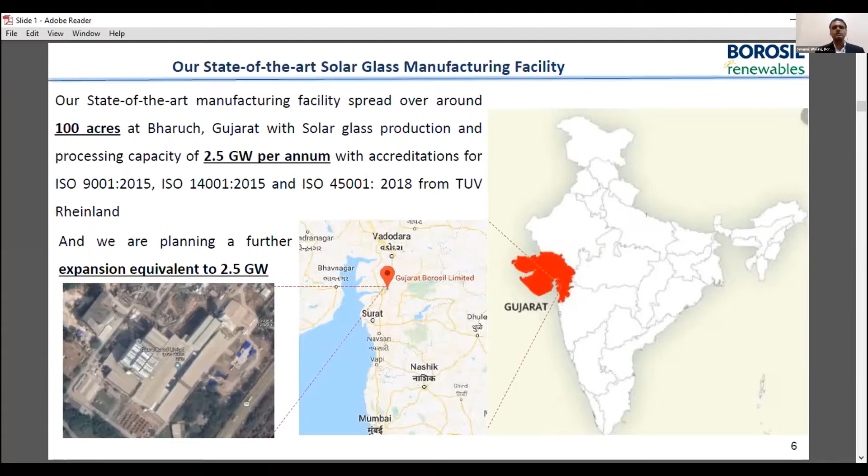So we'll be a 5 gigawatt company when it comes to solar glass for the modules shortly. So these are some of the photographs of our factory. We also have an R&D setup of 302 kilowatt on a rooftop, and we are expanding that setup. Very shortly we'll be having one more R&D setup where we'll be testing many solar modules as well as

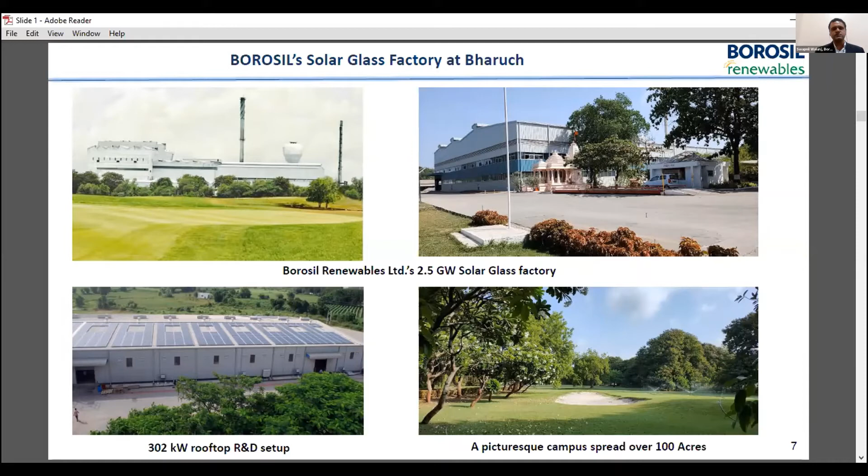glass technologies. Then I'll come to the main topic, solar glass and the importance of selection of high quality glass in solar modules. So all of you know this, solar glass is one of the important components of the solar module, which primarily protects the solar photovoltaic cell against damages from external factors like water, moisture and dust. But that's not the only thing. It also offers low reflection, high transmissivity and high strength to the module.

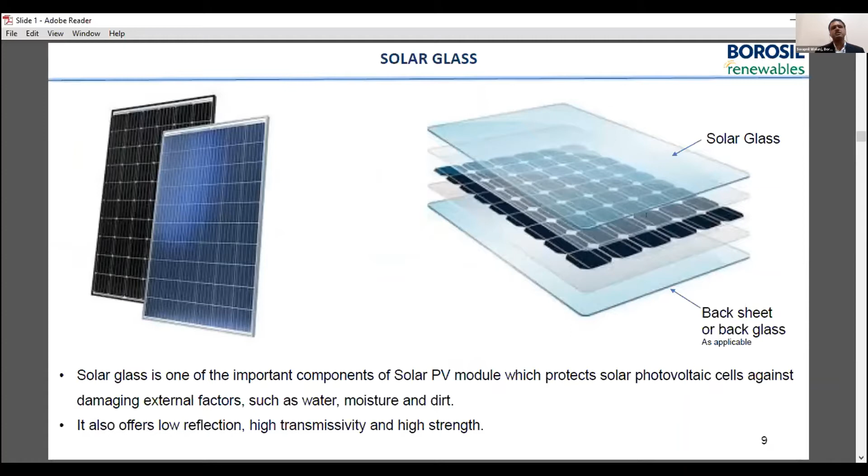So that's how solar glass is important, and why we should be careful while selecting the solar glass is this very popular graph that almost everybody refers to. So if you see the failures, they are categorized in three categories: infant, midlife and wear out failures. Typically infant failures happen very quickly, and those related to glass are primarily glass breakages.

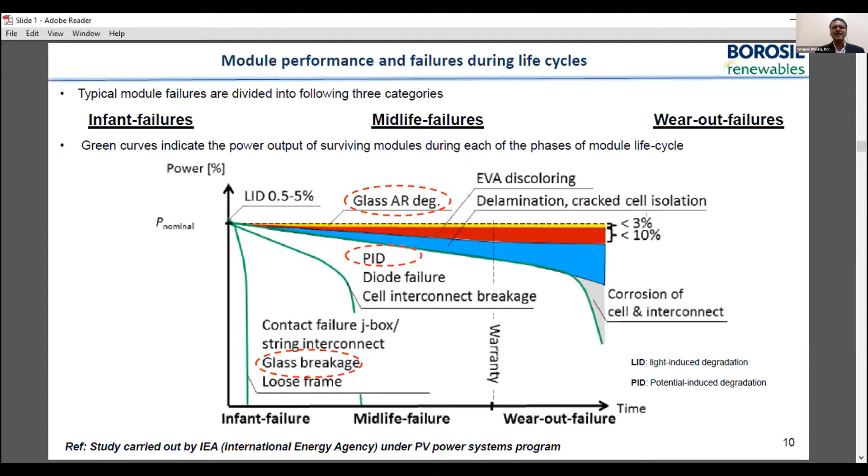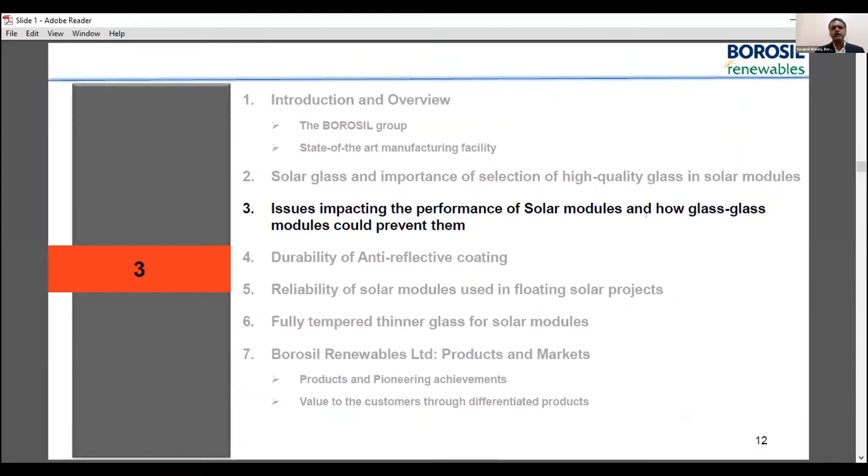So I'll move on to the next level of details. What are the kind of issues that are directly related to solar glass? So what happens if we are not careful while selecting the solar glass, or not careful while designing the solar modules? The immediate impact is due to cracks, basically micro cracks in solar cells. They happen typically during transportation or even installation.

Since the module design is also driven by glass, if the design is not done properly, then there is a risk of cracks or micro cracks, which will ultimately spoil the performance of the modules. Then there are of course snail trails, which is basically discoloration of the panel. This happens typically over a period of, let's say, 2 years, and then power production starts being impacted. There is also another issue of moisture ingress, which I'll come to in the next slide, which happens through the backsheet, and then it starts impacting the EVA as well as the cells.

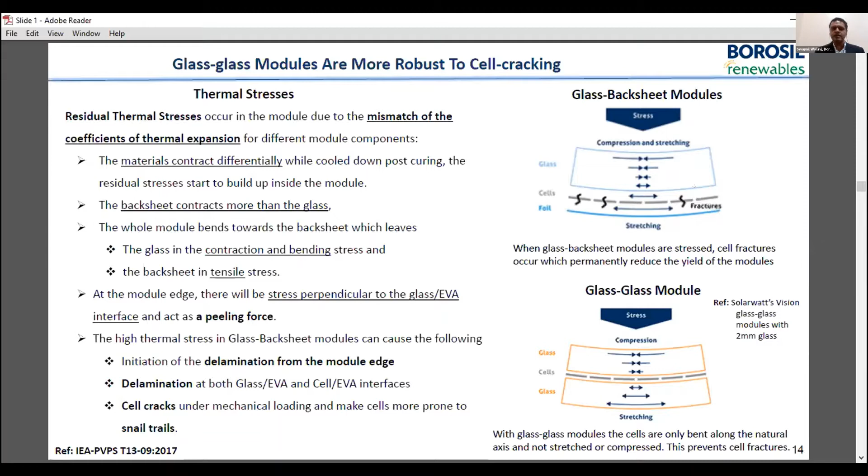So has it been proven in the lab as well as field? Yes, definitely. I have one example where sequential tests were carried out. They took monofacial as well as glass-glass bifacial modules. Monofacial is typical glass to backsheet. The sequential tests were, first, the thermal cycling sequence test, second, UV plus dynamic mechanical loading, and third, the more severe version of sequence 2.

What they observed is the power loss is more in the case of the glass-backsheet module as compared to the glass-glass module. All the top curves that you see, bifacial glass modules in black or blue, have lesser degradation of power over time. And even the thermal imaging shows a clear picture that the bifacial glass modules are more robust after these sequence tests. So it proves that glass-glass modules perform better under sequence tests as compared to glass-backsheet modules. They are expected to better weather these mechanical stresses and also moisture or oxygen ingress. Hence, they are expected to perform better in the field.

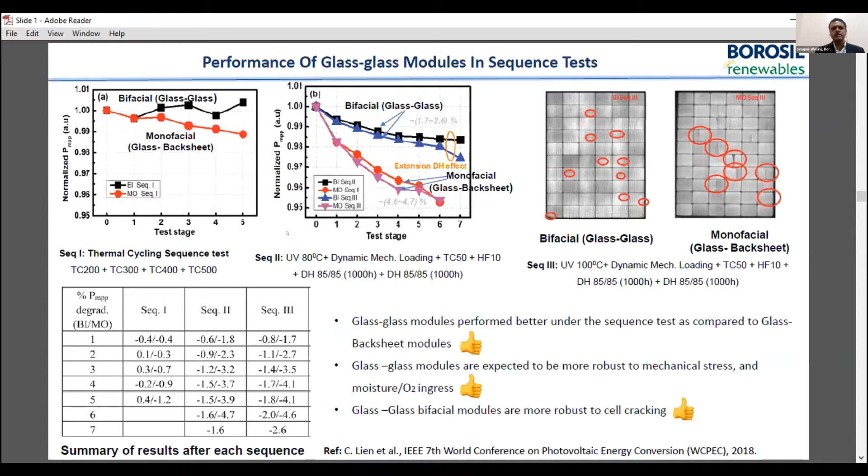So the next part is there are some concerns about the weight of the glass. So we have tried to plot the weight of the glass. If you take a typical monofacial 72-cell module, the weight today

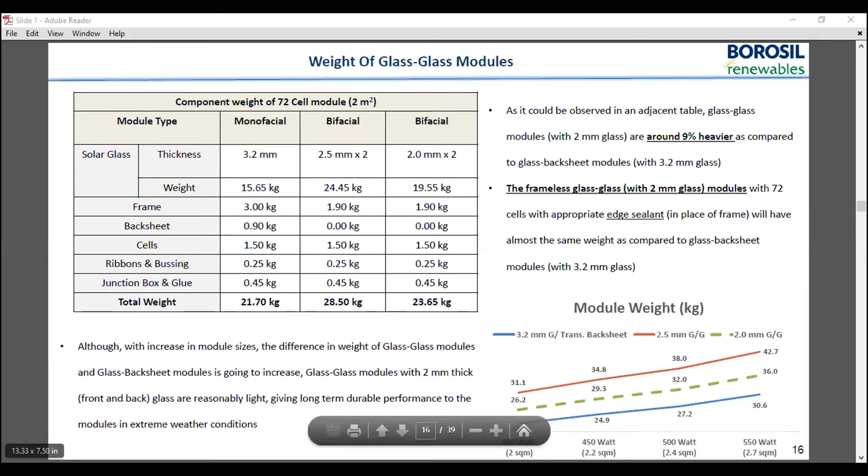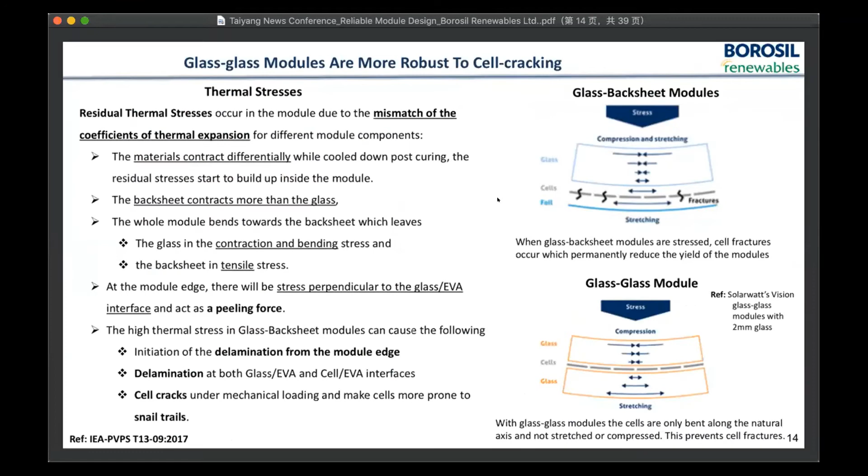Swapnil? You are on mute. Just unmute yourself. Can you hear me now? Yeah, maybe you can turn off the video so that the bandwidth is good. Yeah, sure. So could you make me host? I think I lost the connection and hence I'm not a host anymore. Okay. Min? Min? Yeah. You got it? Yeah, next slide, please.

So the weight of the solar module was something that we were discussing. With this 3.2 mm front glass of a monofacial module, all things put together, the module is around 21 or nearly 22 kg. Now, if I use the bifacial module with 2.5 mm glass on both sides, the weight increases to around 28 and a half kg, which might be an issue. So there is a solution. Instead of 2.5 mm glass, if we use fully tempered 2 mm glass on the front and heat strengthened glass of 2 mm thickness at the back, the module weight is now 23.6 kg, which is about 9% higher than the normal monofacial module.

So this difference could be eliminated. Here the module typically has a frame, which is of the order of 2 kg. So if we eliminate the frame altogether and use a proper edge sealant, then they are at par with the monofacial module. So the bifacial module with 2 mm thick glass on both sides, frameless, with a proper edge sealant that lasts through the contract period or module life, will have no issue of weight. Otherwise, if we keep using 2.5 mm glass, a lot of weight will be added.

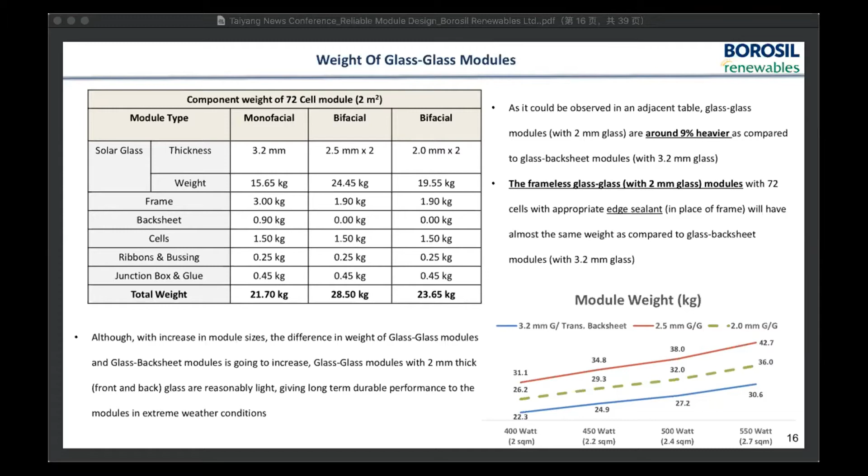So another issue is the durability of anti-reflective coating. If you could go to next slide, yeah. So today anti-reflective coated modules or anti-reflective coated glass is a norm. Almost everybody wants anti-reflective coated glass. There is a need to have anti-reflective coating which is not only giving you the higher gain, but also the durability should be long enough.

Today, we have received feedback from many developers that on the modules that have been supplied to them, the anti-reflective coating has waned much prior to, I'll not even say the contract period, but much prior to their expectations. A handful of months, to be honest. So that's why we are very much concerned about the anti-reflective coating. Although we are not a supplier of anti-reflective coating, since it gets coated at the time of the manufacturing of the glass, we are extremely sensitive about this issue so that our customers don't face any issues.

So we use globally renowned anti-reflective technologies that typically give 1.7 to 2.3% higher transmission. But we are much more concerned about the durability. So laboratory tests are carried out by us first in the lab, and we also ask these coating suppliers to submit all the standard tests that will prove the durability of those coatings. We also do field trials of modules with coated glass.

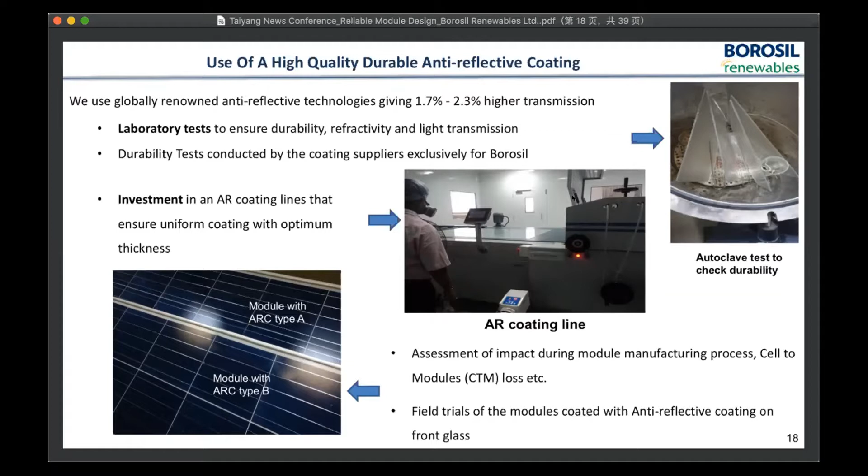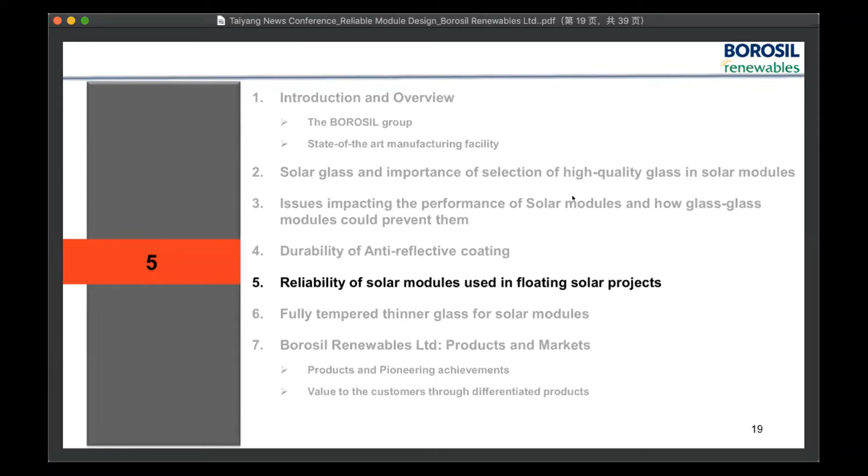Another interesting technology that I wanted to talk about is floating solar projects, because we have been hearing a lot about them of late. They have their own issues, and hence the module design needs to be much different compared to standard solar modules. Next slide, please. So what is so typical about floating solar projects? They are exposed to very high humidity, higher UV radiation compared to ground-based installation, and in some cases the mechanical forces act pretty severely and constantly due to waves wherever applicable.

So the design requirements are that the modules need to be wave and corrosion resistant. Durability is very important while designing those modules. The light weight of the system is also important, and optimum cost of structure, which is an important point when it comes to the viability of the projects. There is the salt spray test, which is one of the toughest tests. Many modules initially do not succeed in this salt spray test.

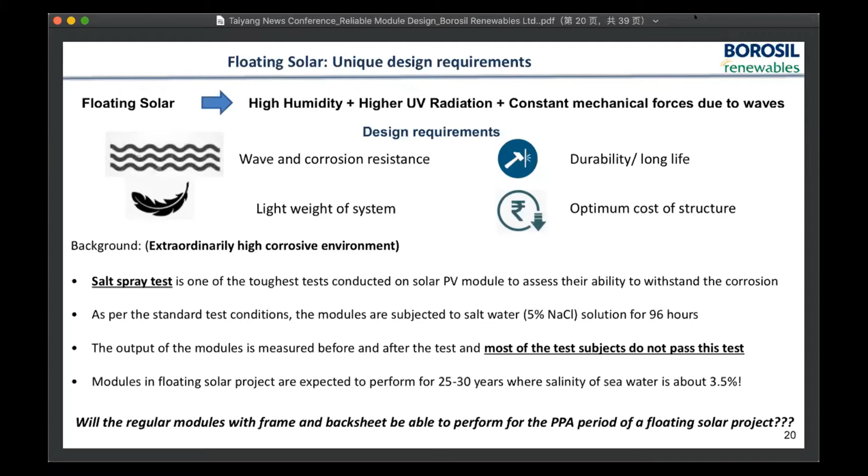If you go to the next slide, I'll be able to throw more light. So these are various snapshots. The ones at the top are the modules being used today for floating solar. But if we could tweak the designs, and some developers have already started doing this, if the floats are designed differently and we put in glass-glass modules, there are certain advantages. The design of the modules as well as the floats ensures minimum transfer of forces onto the module. The cost of the module structure is also very low.

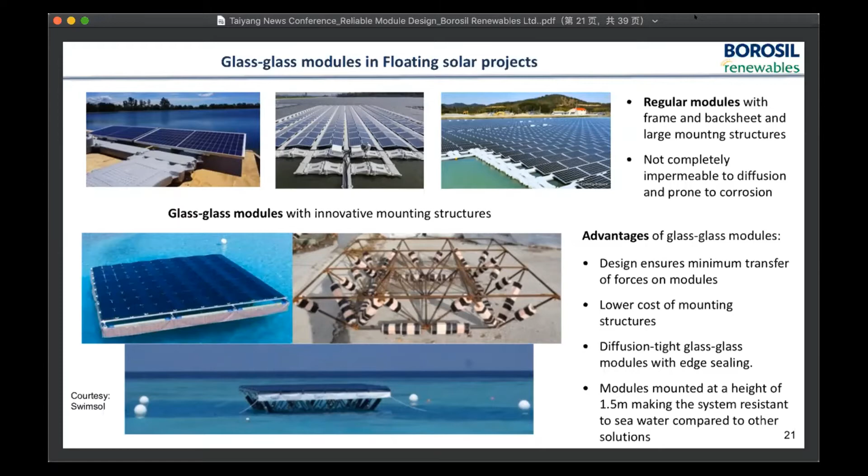And the most important aspect is these glass-glass modules are diffusion tight with proper edge sealing, and they are mounted at a height of at least 1.5 meters, so they are not exposed to seawater directly. These are the inherent advantages these glass modules have. If you go to the next slide, I'll tell you the quantitative impacts. Yeah. So as I suggested, glass modules.

A typical glass module is 700 times more water vapor diffusion tight as compared to the normal module. And with the right combination of encapsulation foil and edge sealing, the glass module with typically 2 mm fully tempered solar glass performs excellently, much better as compared to the normal module under extreme environmental conditions. So this edge sealing ensures that the module lasts long, even beyond 30 years.

There is high reliability, so fewer module failures, and also, considering the overall design, a low cost of ownership due to lower BOS as well as other costs. When it comes to why we say durability, it also has to do with degradation. There were some tests done, and if you use a 2 mm glass module with proper edge sealing as well as the lamination foil, the degradation is minimal.

So we feel that with glass modules, we will be able to have modules which last long, considering the high humidity and tropical environmental conditions, the seawater, basically modules floating on seawater, and also exposure to high UV radiation. So glass modules are the best solution for floating solar projects, in our opinion. Next slide, please.

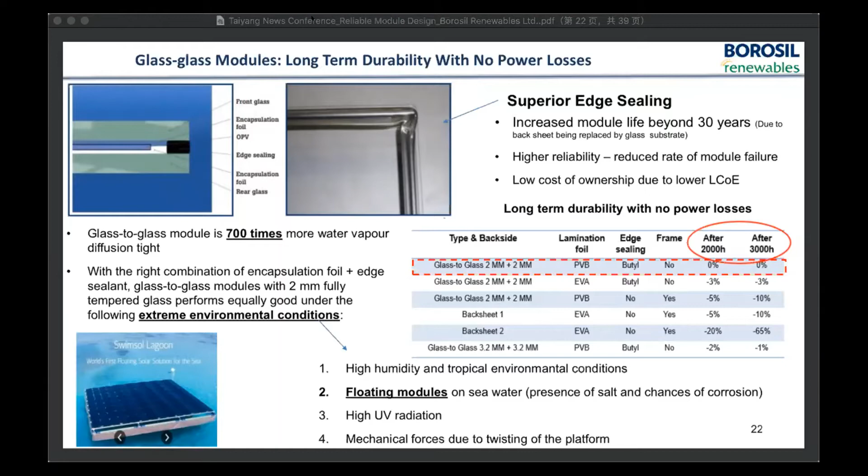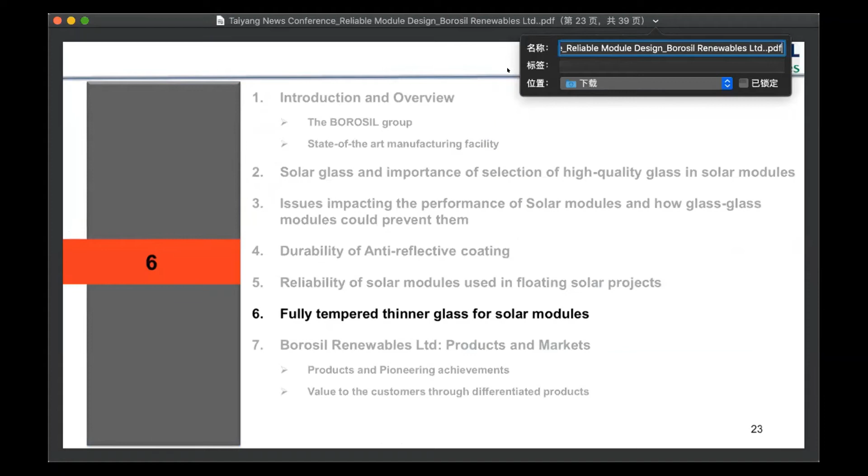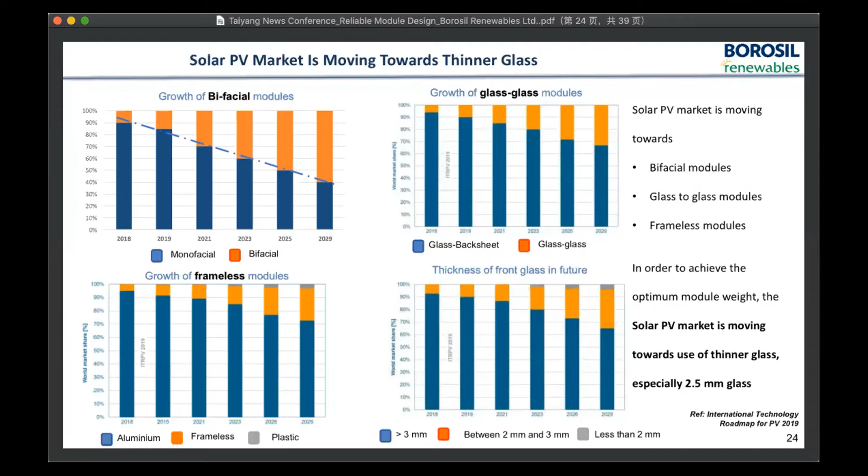Next slide, please, Neil. Yeah. So as I was talking about the 2 mm fully tempered thinner glass, Borosil has been the first solar glass manufacturer to supply this thinner glass to module manufacturers, making it fully tempered as compared to the heat strengthened glass that has been supplied to the market. So what are the unique features of this thinner glass, including 2 mm? Slightly higher transmission because of less material, enhanced mechanical strength, and long-term durability, basically due to lower PID.

And as we have been seeing in the past slides, bifacial and glass frameless modules will be more suitable for floating solar applications and building integrated PV, which has been dominated by thicker glass of 4 mm and beyond. The graph tells you that with 2.8 mm thinner glass, the module weight reduces by 15%. With 2.5, it reduces by 20%, and with 2 mm thinner glass, the module weight reduces by 35%. So that's how module weight can be optimized using thinner glass, which also brings down the structural design requirement.

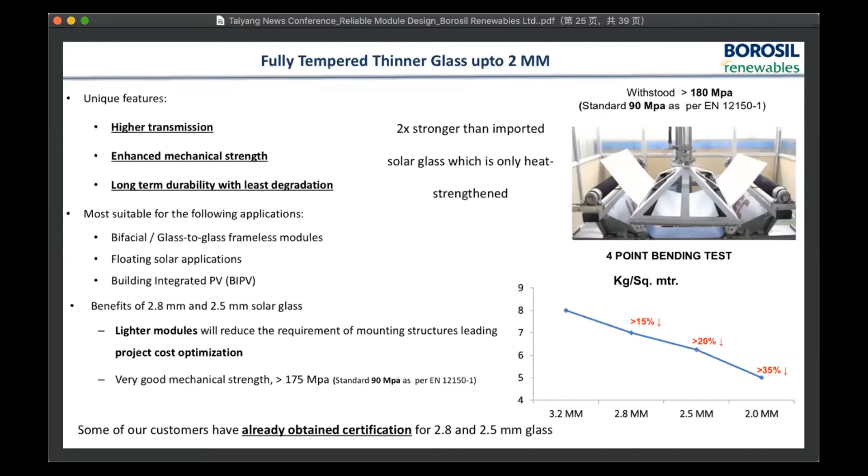So the project cost could also be optimized that way. It has a positive impact on LCOE as long as it meets the basic safety requirements of the project. Next slide, please. And as I was suggesting, many customers have started adopting 2.8 and 2.5 mm thin glass. I'll come to the last part of this presentation. I'll talk something about Borosil Renewables Limited now.

Our product portfolio, as you know, we have been catering to several market segments: utility scale ground mounted solar PV, greenhouses, the solar rooftops, and even solar thermal. One typical thing that I would like to tell you about our innovation: we are the first company to develop a solar glass, and so far we are the only company who have developed the solar glass which doesn't have antimony at all. Antimony is a toxic element, and I'll explain later in the presentation why we have removed the antimony.

There are other recent innovations. We have developed a glass called Selene. It is an anti-glare solar glass for the modules which are to be installed near airports in order to ensure aviation safety, so that there is no glare and the pilots don't get impacted because of the glare while landing or taking off. So this is a new product that we have recently launched.

We have also launched a product which is matte in finish, plain on both sides, which has slightly higher efficiency. As I have said, we are working with reputed coating suppliers for anti-reflective coatings, and now we are also working on anti-soiling coatings. There are some coatings that have been launched which have anti-reflective and anti-soiling nature in the same coating.

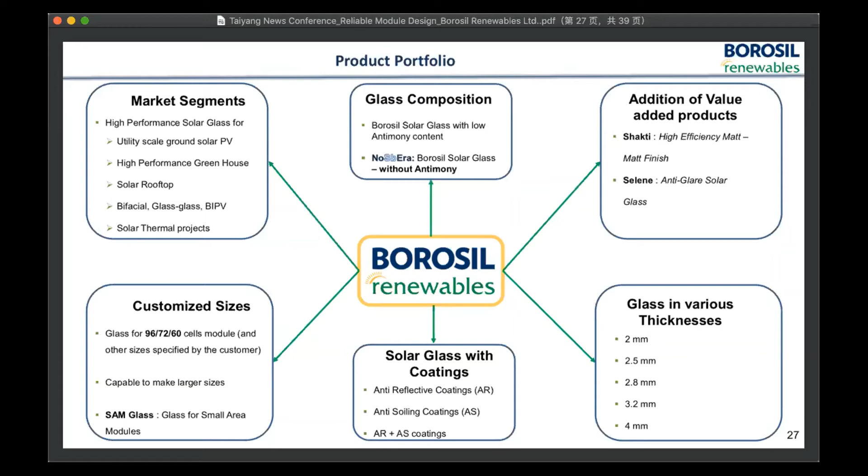Yeah. So this is the antimony free solar glass. Antimony is a toxic element. The maximum content of antimony in water is 6 parts per billion by WHO, which is much less as compared to another toxic element like arsenic, which has 10 parts per billion. So it is so severe.

And today, due to lack of sustainable recycling processes, the modules which are ending life or the faulty modules are being dumped into the soil. Once they are dumped into the soil and the glass gets crushed, the antimony from the solar glass leaches out very easily. It is as easy as the sugar that comes out of candy. I'm being pretty simple. It's that simple. And this antimony that leaches out of the solar glass will ultimately get into the groundwater and will definitely cause havoc to the local environment.

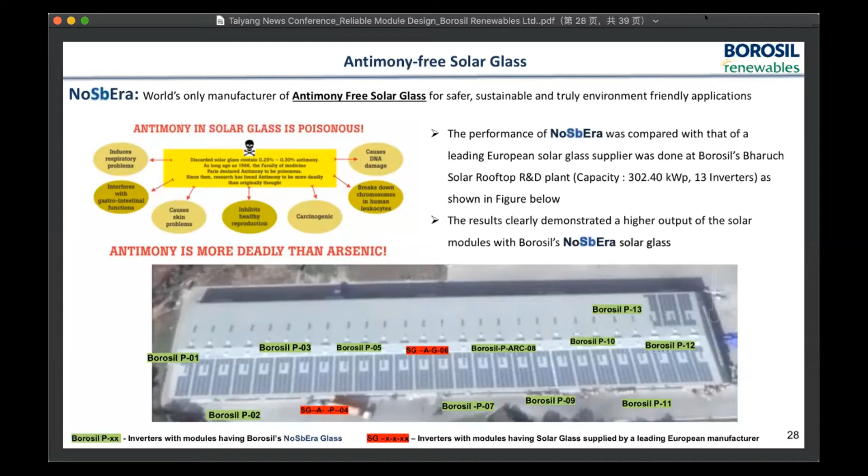So we have been pretty much aware of this issue, and we want our solar modules to be really green, and want our future generations to be secured from the issue of antimony. We have developed a glass which we have called NoSbEra, and we have done field trials of this glass on our R&D rooftop facility, where we have found reasonably better generation as compared to the glass with antimony. We are doing several trials of this glass with a few reputed institutions in India as well as abroad, and we are sure that with this product we'll be able to have solar modules and solar glass which are really eco-friendly and truly green. So next slide, please.

So we have this as a USP. Next slide, where there are other USPs. Since the time is very limited, I'll quickly take you through other USPs.

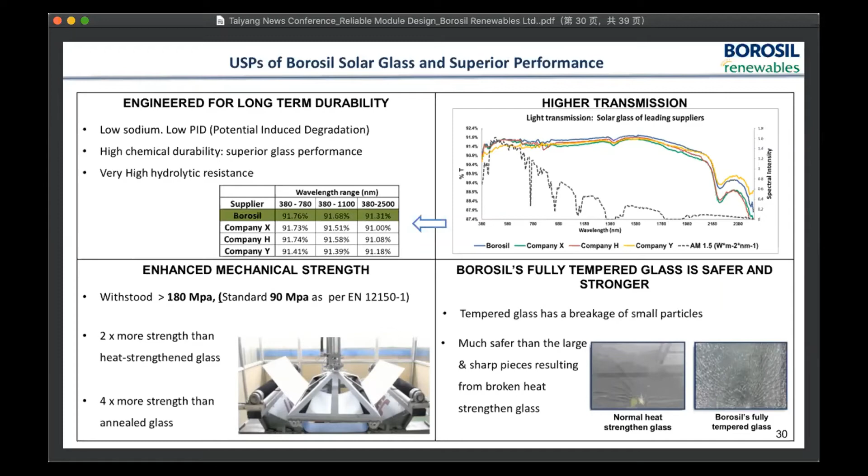Yeah, so this is what I was talking about. There is already a comparison done by a reputed European institute, where they have carried out the PID test, and our glass has been found superior as compared to the other well-known competitors. Can you go to next slide, please?

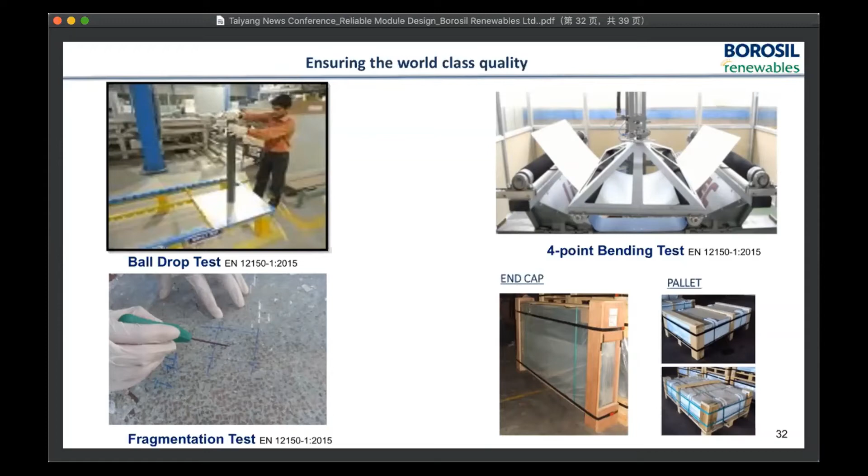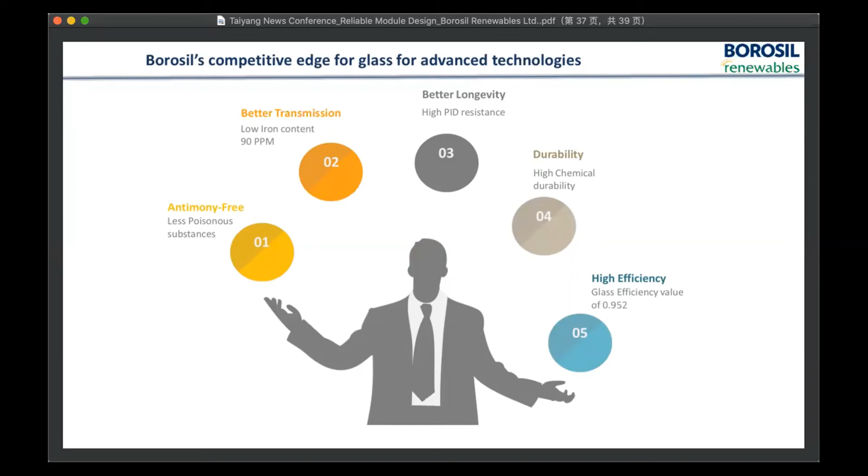Next slide, please. Yeah. So as a summary, some of the competitive advantages that we have are antimony-free glass, better transmission, better longevity, better durability, and the high efficiency that we have seen in the previous slide. So next slide, please.

Yeah. The next part of the competitive edge is the larger modules. Since the world is now moving to larger modules, we have a special capability to handle larger glass, 2500 mm by the width of 1500 mm. Basically, as compared to 2 meters by 1 meter glass, we could also fully temper the solar glass as well as coat it for this configuration. These modules are typically 500 plus watt modules, so we are geared to supply to this segment also.

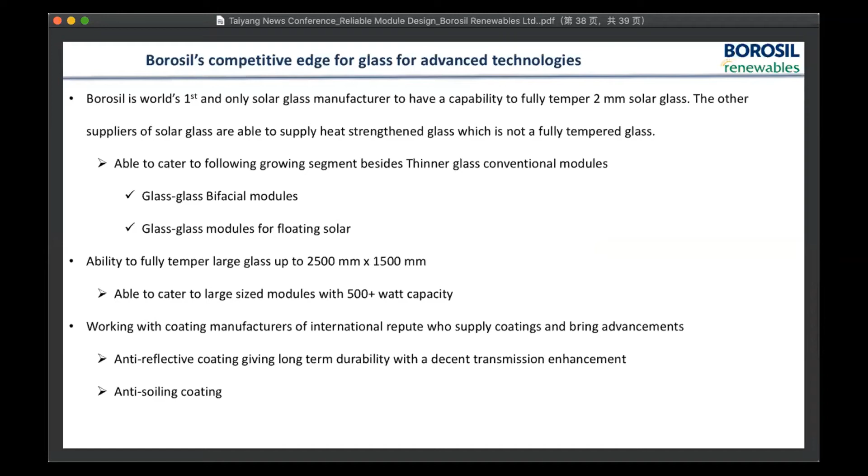And we have been working with anti-reflective coating as well as anti-soiling. Anti-soiling is becoming a very important aspect for solar modules in future. And we have ready products with our associates who we have been working with for several years. So I think that's all from our side.